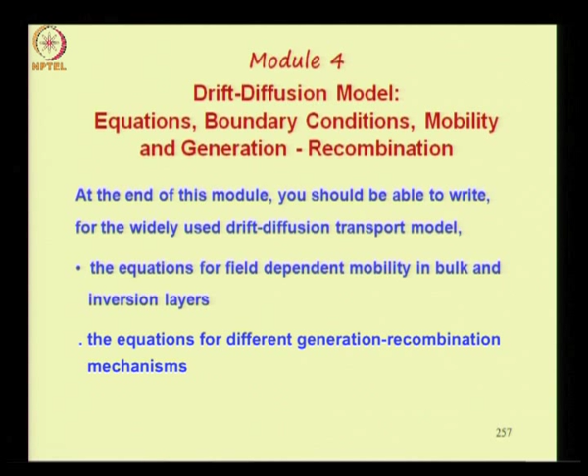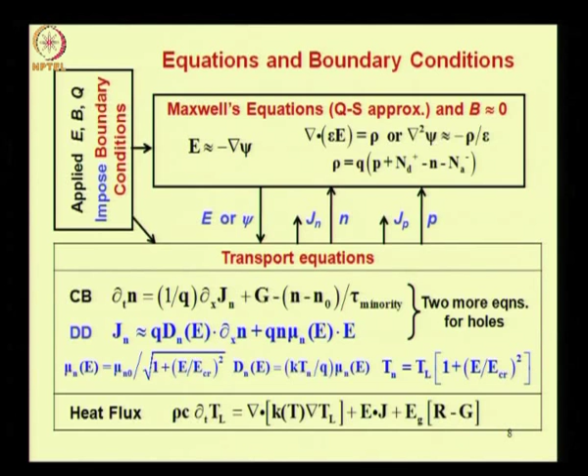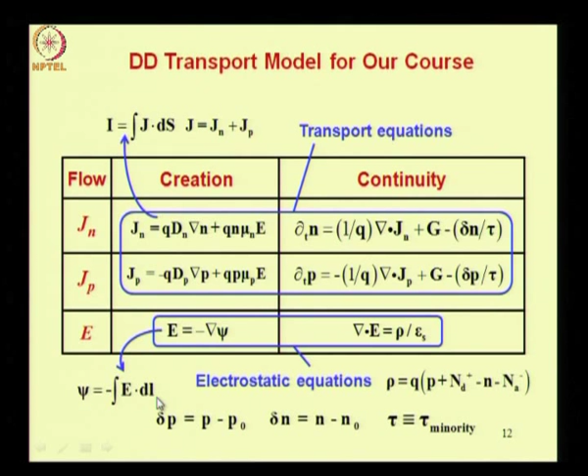Often the equations of Jn and Jp are referred to as current density equations, and the equations of carrier balance, the electron balance and hole carrier balance - that is, dou n by dou t and dou p by dou t - involving these are referred to as continuity equations. And this equation is Gauss's law: divergence of E equal to rho by epsilon.

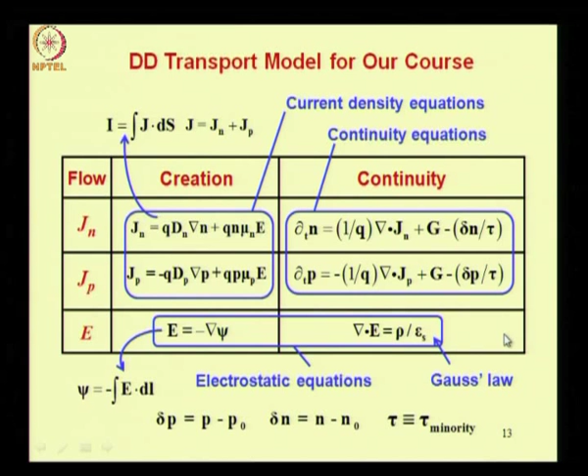Now, though we have 6 equations, ultimately they can be reduced to just 3. So, in a sense, in the drift diffusion model there are just 3 coupled equations, and these are continuity equations in n, p and psi. So how do you get these?

These equations are obtained by substituting the equations from the creation column into the continuity column, subject to conditions on n, p and psi at device boundaries. So you take the equation for Jn from this column and put it in the continuity equation, in the divergence of Jn term.

Now, Jn is given in terms of the carrier concentration and the electric field. The electric field in turn depends on the potential psi. So if I combine the equation for Jn and substitute it here, ultimately I will get an equation for n in terms of psi and other quantities.

I can do the same thing for Jp - take Jp and substitute it in the continuity equation. Finally, I take the equation E equals minus grad psi and put it into Gauss's law, and I get the Poisson's equation in psi. That is how I reduce these 6 equations into just 3 coupled equations.

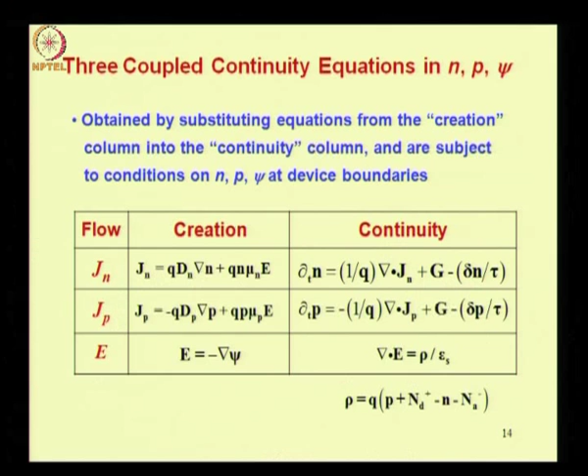Now, what is the physical meaning of this mathematical coupling? When we say these equations are coupled, it denotes the fact that carriers perturb the field which causes their motion. The motion of carriers is because of the field, but as carriers move, they redistribute the concentration, and this redistribution sets up a space charge, which creates an electric field according to Gauss's law. That is how it is a coupled situation.

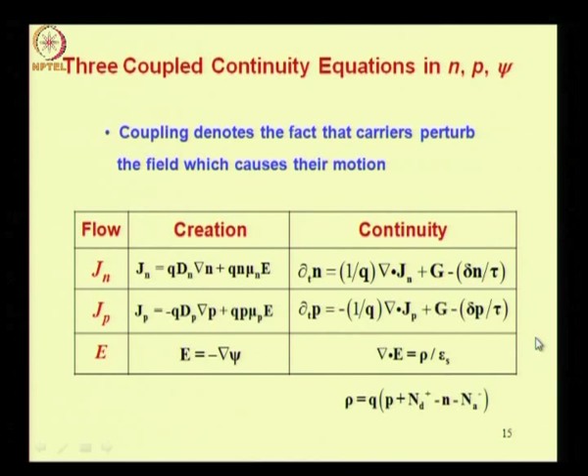Now we have not written down the 3 coupled equations - I am leaving it to you as an assignment. Write the 3 coupled equations in n, p and psi, assuming the mobilities of electrons and holes mu, the diffusion coefficients d, the lifetime of minority carriers, and the dielectric constant of the semiconductor epsilon s are spatially invariant. In the previous module we used epsilon for the semiconductor dielectric constant; in this module we add a suffix s, because we will also encounter the dielectric constant of the ambient surroundings, denoted epsilon suffix a, to have clarity on which dielectric constant we are referring to.

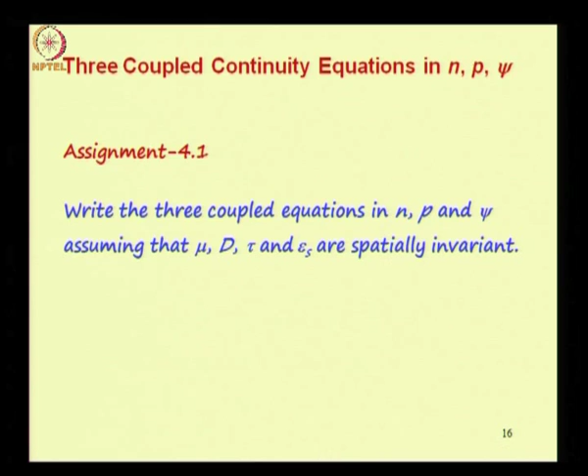Let us look at the boundary conditions on n, p and psi. The 3 boundary conditions, one each on n, p and psi, are required to solve the 3 equations.

Now the boundary condition on a quantity such as n, p or psi can be on either the magnitude of the quantity. Such a condition is called the Dirichlet condition, or the derivative of the quantity. Such a condition is called the Neumann condition, or a combination of the other two, referred to as a mixed condition.

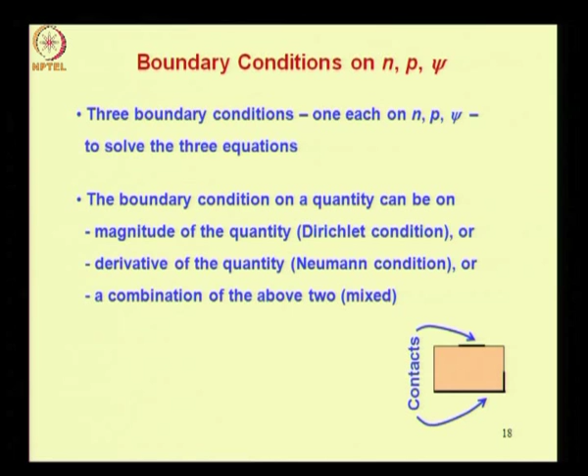In other words, the boundary condition can be on n, p and psi, or gradient of n, gradient of p and gradient of psi, or on a combination. So you can have a boundary condition on the electron concentration given in terms of an equation which consists of both n as well as grad n. That is the mixed condition.

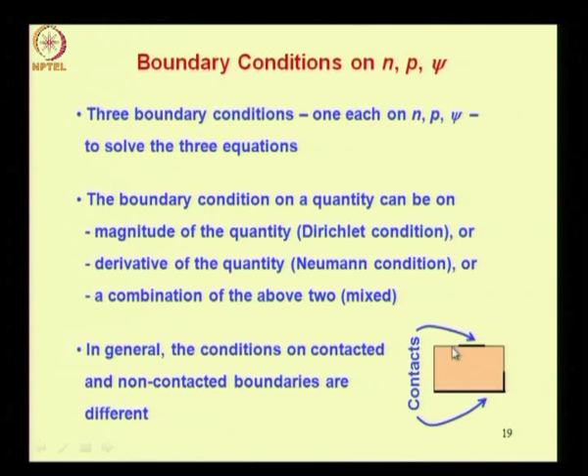In general, the conditions on contacted and non-contacted boundaries are different. Here is a conceptual device showing the contacts and the non-contacted boundaries. Let us look at ideal boundary conditions on n, p and psi, which we shall illustrate with the help of an example.

Let us say you have a uniform semiconductor block with a short contact on the top surface and a contact covering the entire bottom surface, and you are applying a voltage between these two. This situation is referred to as a spreading resistance, because the current spreads from a smaller contact to a larger contact.

Now at the contacts, the ideal conditions on n, p and psi are that the carrier concentrations are uniform at their equilibrium values. So n is equal to n naught, p is equal to p naught - uniform concentration at this end wherever you have the contact. Similarly, you have uniform concentration equal to the equilibrium concentration at the bottom contact as well, n equal to n naught and p equal to p naught.

The potential is assumed to be uniform, like the uniform concentration. At the top contact, the potential is assumed to be psi s equal to psi naught plus V, where s refers to the surface - psi s is the potential at the semiconductor surface. This is equal to a built-in potential plus applied voltage. Since in general the semiconductor may be non-uniform, there can be a built-in potential, so that is also incorporated here, and V is the applied voltage.

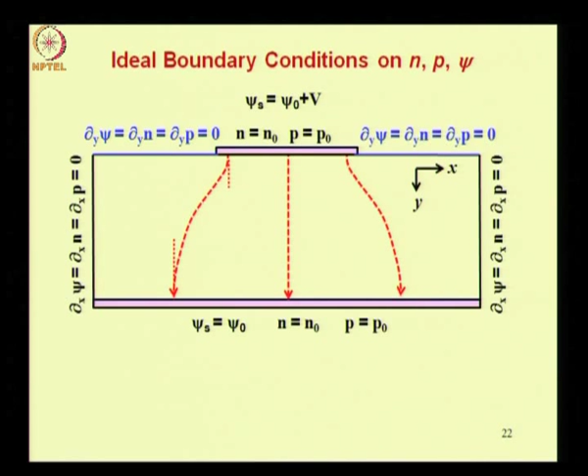The same thing applies to the potential line emerging from the sides. So even here the potential line is perpendicular, meaning in this direction there is no field.

Summarizing the boundary conditions, the ideal boundary conditions you have at an ideal ohmic contact: carrier concentration is equal to the equilibrium value and uniform, and the potential is also uniform at the applied voltage plus the built-in voltage. At an ideal non-contact, the perpendicular gradients of the concentrations N and P and the perpendicular gradient of the potential are all 0, because no current can escape or no field can escape out of the device or enter the device.

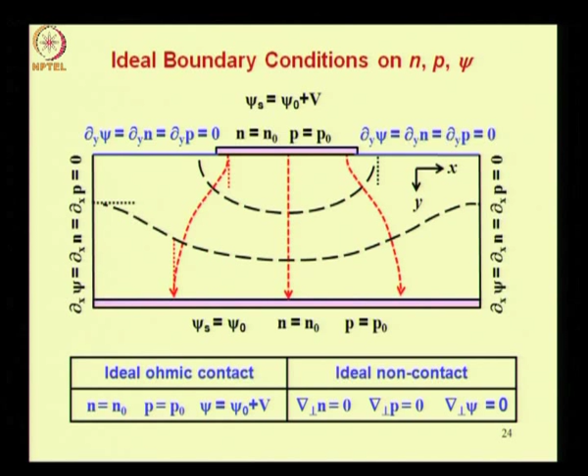Now let us look at general boundary conditions. What we have discussed so far are ideal conditions, which may apply in many devices, particularly large size devices. However, there can be instances when you do not have the ideal conditions existing. Let us look at, in general, what factors can influence the conditions on n, p and psi at the boundaries.

We would like to define a few quantities here. JTE is thermionic emission current density, JTUN is tunneling current density, R suffix C is contact resistivity, rho suffix S is surface charge density. So rho without suffix S is space charge, that is charge per unit volume, but rho suffix S is charge per unit area.

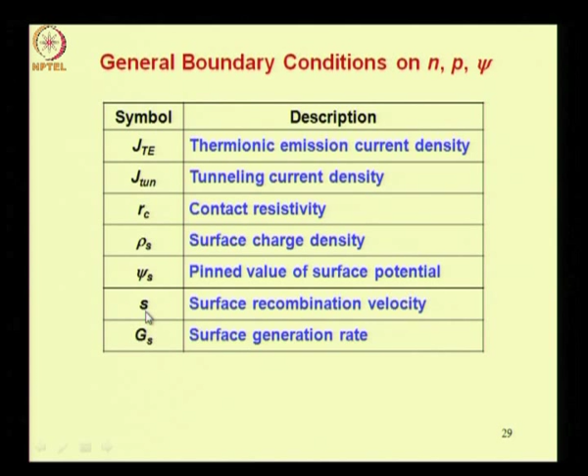Psi S is the pinned value of surface potential; we have already used this term in the ideal boundary conditions. S is surface recombination velocity. G suffix S is surface generation rate. Epsilon suffix A is ambient permittivity and epsilon suffix S is semiconductor permittivity. These epsilons include the permittivity of vacuum, so epsilon S, for example, would be equal to the dielectric constant of the semiconductor multiplied by the permittivity of free space.

Now we shall write the equations for n, and similar equations would be used for p. So whenever we are writing equations involving both p and n, that will be evident.

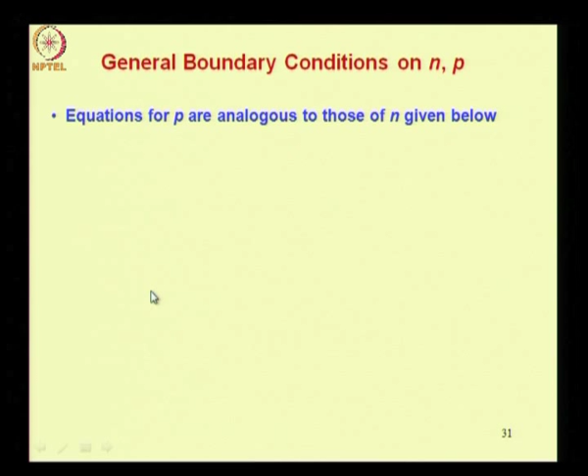At any boundary at x equal to 0, let us assume you have a semiconductor block as shown here, and we are assuming a one dimensional situation in the x dimension, and the boundary we are talking about is at x is equal to 0 — this vertical boundary.

Now, at any boundary, the condition is imposed in terms of the perpendicular current density. This is the important point, because we can talk in terms of how much current is leaving or entering the boundary perpendicular to it. At contacts, you will have a non-zero current leaving or entering the boundary perpendicular to it. At non-contacts, you will have no current entering or leaving the boundary. Therefore, though ultimately we want conditions on n, p and psi, basically the conditions are on the current density, and from there we can derive the conditions on n, p and psi.

Any current density is composed of the diffusion current and the drift current in our drift diffusion model. Let us explain the symbolism here. So what does J n perpendicular at 0 mean? What does the perpendicular gradient of n at x equal to 0 mean, and so on?

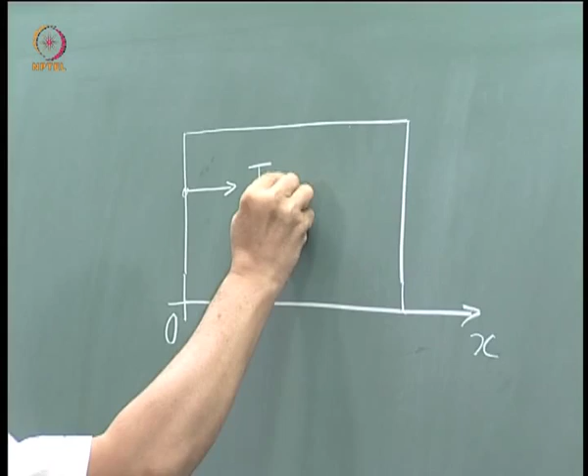So, this is your semiconductor, and let us say this is the x direction and this is the origin. The current at this point in this direction is referred to as Jn perpendicular with a 0 there, meaning the value of this current at this point.

Similarly, the electric field perpendicular means the electric field in this direction at 0, that means the field here. n of 0 means the electron concentration at this point, so that would be n of 0.

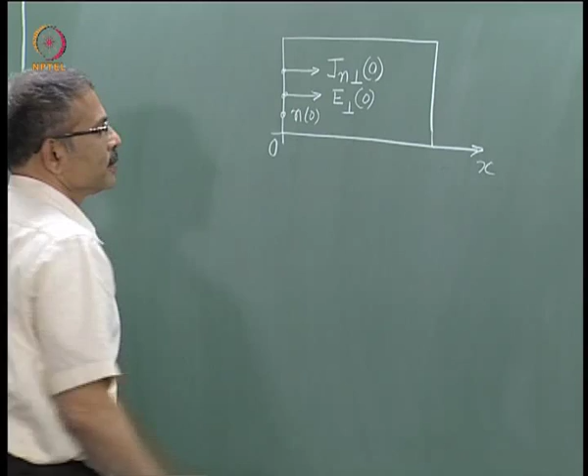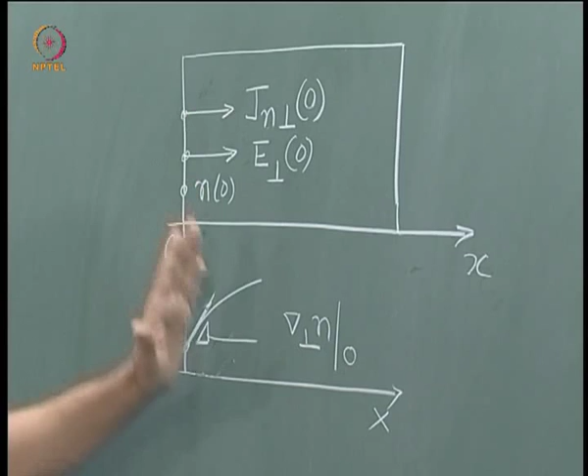Now, what about the perpendicular gradient of n? For example, if within the device your carrier concentration of electrons is changing like this, then this is the gradient of the electron concentration at the origin. So this gradient is referred to as the perpendicular gradient of electrons, and since it is at this point, we call it with a suffix at x equal to 0. So this is the meaning of the various terms used in the equation.

At any non-contact boundary, again assuming that the boundary is at x equal to 0, n and p are related based on the condition that the total current J is equal to 0, that is Jn perpendicular at 0 plus Jp perpendicular at x equal to 0 is equal to 0.

This is important. Actually, at a non-contact boundary, no current can enter, and when we talk about no current, you must consider the combination of electron and hole currents, not just individual currents. Let me give you an example where the individual currents of electrons and holes are non-zero, but their sum contributing to the total current is 0.

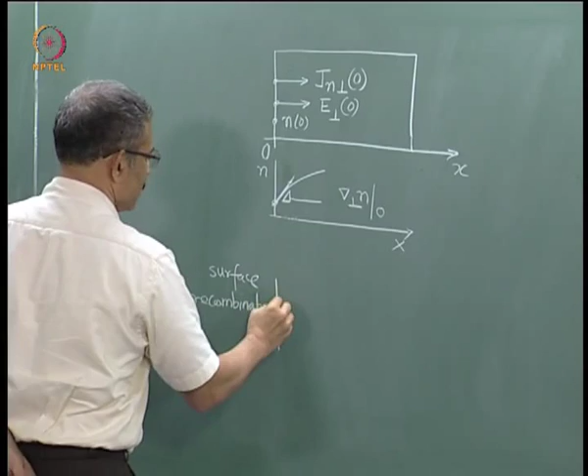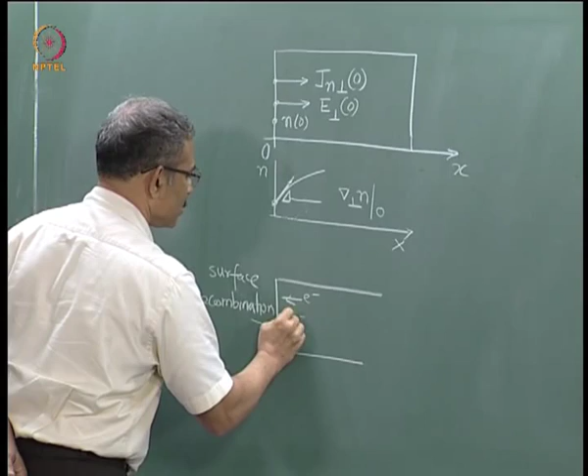Suppose I have surface recombination at this surface, and this is your semiconductor. Then what will happen is the electrons will tend to move in this direction and holes will also tend to move in this direction, and here at the surface they will recombine.

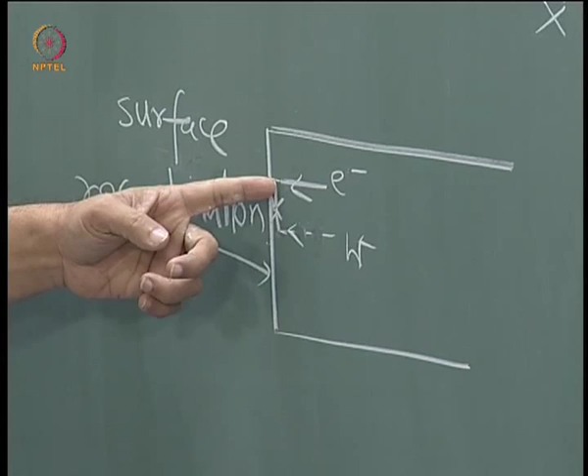So you see, because of the electron movement into the surface, you have an electron current, Jn, in this direction. If electrons are moving in this direction, your Jn perpendicular is like this, and if the holes are moving in this direction, it contributes to Jp perpendicular like this, and these two currents are cancelling each other. That is how it is resulting in the condition J perpendicular at 0 is equal to 0.

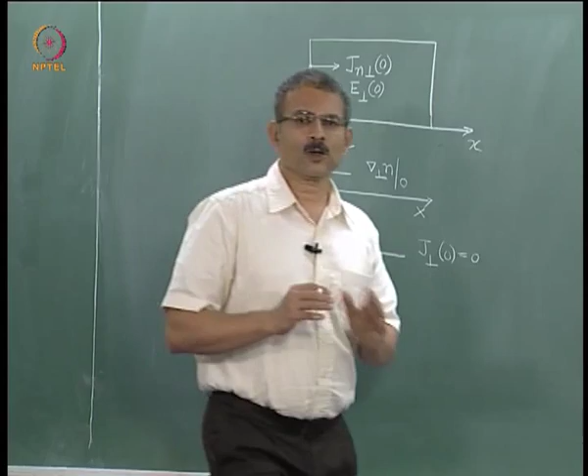So this is an example of a non-contact surface with surface recombination. You have both electron currents and hole currents at the surface, but the sum total of them is 0. Therefore, at a non-contact surface, we must think in terms of the total current to begin with, and later on we may find that if there is no surface recombination, then individually also the currents can be 0.

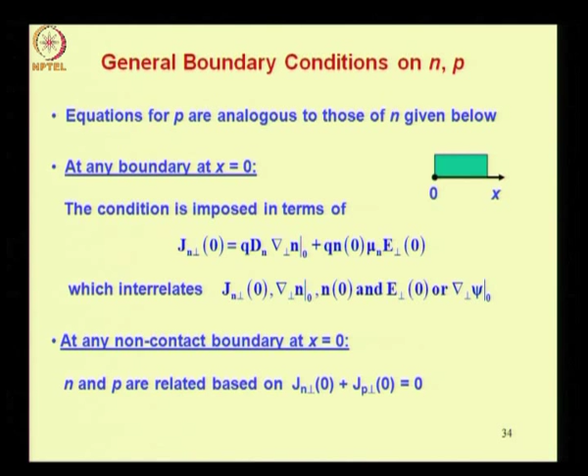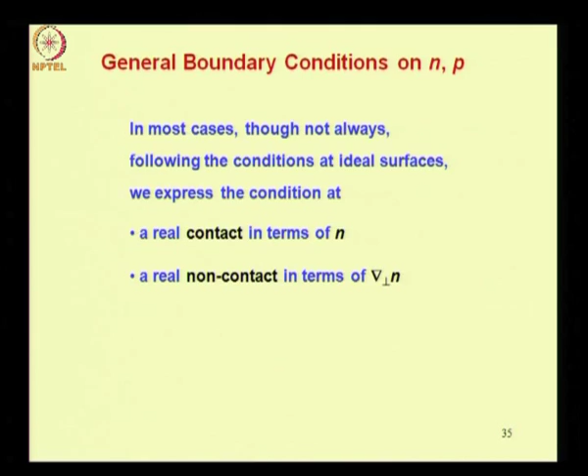In most cases, though not always, following the conditions at ideal surfaces, we express the condition at a real contact in terms of n, and a real non-contact in terms of the perpendicular gradient of n at the surface. We said that under ideal conditions, at an ideal contact, the electron concentration n equals the equilibrium value. Therefore it makes sense to see under non-ideal conditions how much n differs from n naught. Similarly, the ideal condition at a non-contact is that the perpendicular gradient of n is equal to 0. It therefore makes sense to see how the perpendicular gradient of n differs from 0.

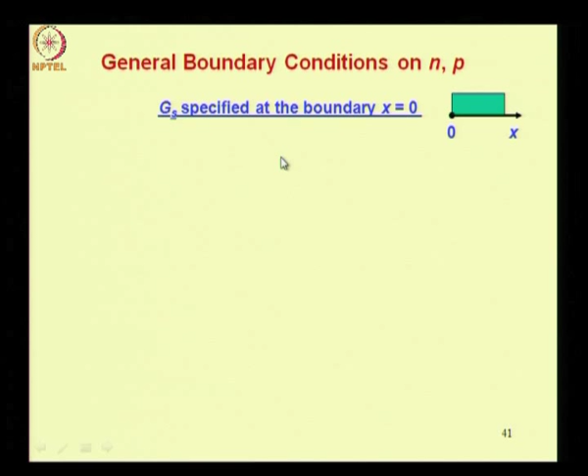Now you are setting Jn perpendicular at x equal to 0 equal to minus q times Gs. This transforms to this equation when you split the perpendicular current density into diffusion and drift components. Now let us explain what is the meaning of this Jn perpendicular at x equal to 0 equal to minus q times Gs.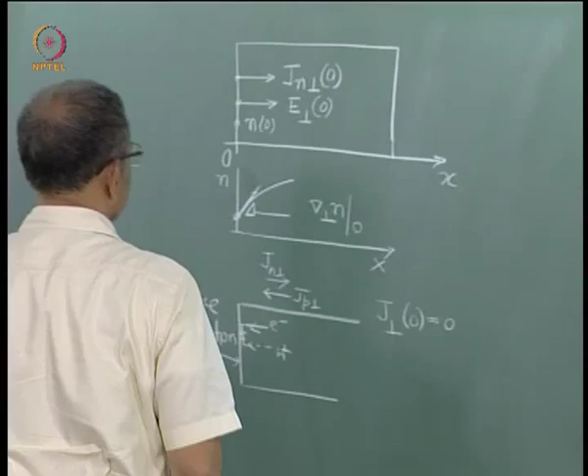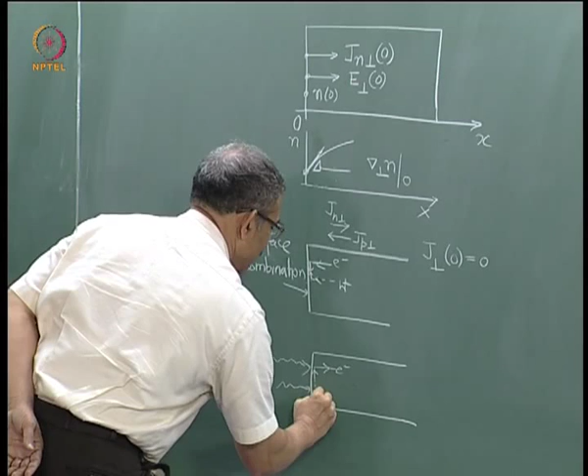So here we are assuming a surface generation at this end. Surface generation has units of per centimeter square per second - number of photons impinging per centimeter square per second, and each of them, let us assume for simplicity, gives rise to an electron hole pair. As a result, you have electrons flowing in, so you have generation of electrons and holes, and then the holes and electrons move in. So it is this current that we are relating to this Gs. That is what we are doing.

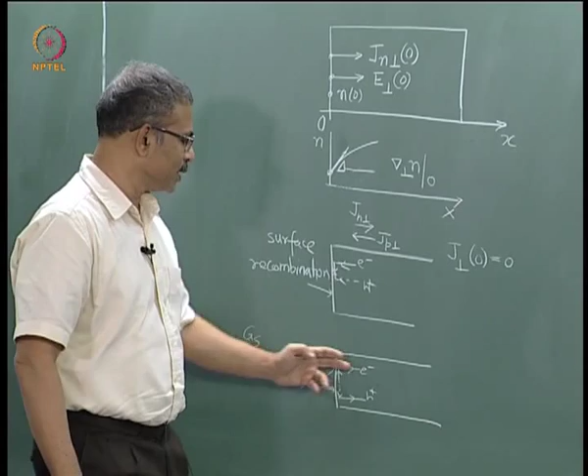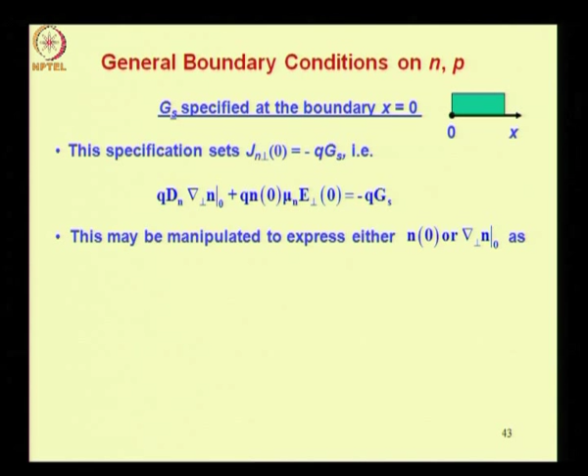Now you can again manipulate this equation as we did for surface recombination, and you will get two equations, one in terms of the electron concentration at the boundary, and the other in terms of the perpendicular gradient of electron concentration. So you will choose n of 0, this equation at contact, and this equation at non-contact.

Now if the thermionic emission or tunneling currents are specified at the boundary, then the equations look very similar to the equations for Gs. All that you need to do is apply the above formulae with Gs replaced by the thermionic emission current density plus the tunneling current density, divided by Q. So you set Gs equal to this value, then you get the boundary conditions in terms of these current densities.

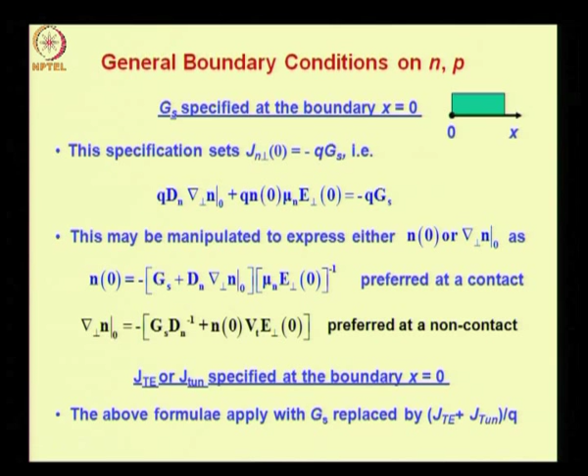Now so far we have discussed the conditions on N and P. Now let us discuss the conditions on the potential psi. You would recall from the formulae we derived for the boundary conditions on N and P that there was an electric field term also, the perpendicular component of the electric field at the boundary. This was entering into the formulae for the real boundary conditions. Therefore we need to understand how we can derive this information, that is, the perpendicular value of electric field, and we also need to know how the applied voltages and so on impose conditions.

So this is what is done now. So, general boundary conditions on psi. Now consider a contact with applied voltage V at the boundary x equal to 0. So we are applying a voltage at this end.

Consequently, the boundary condition on the potential at the surface of the semiconductor, psi s, is happening inside the semiconductor at the surface. We will shortly explain this with a diagram. This is equal to built-in voltage or built-in potential psi naught plus the applied voltage V minus the contact resistance RC into the perpendicular component of the current at the boundary. Note that this current includes both electron as well as hole currents. Let us explain this formula with a diagram.

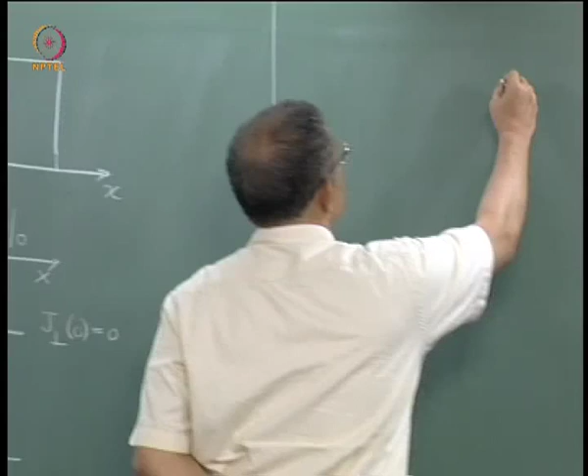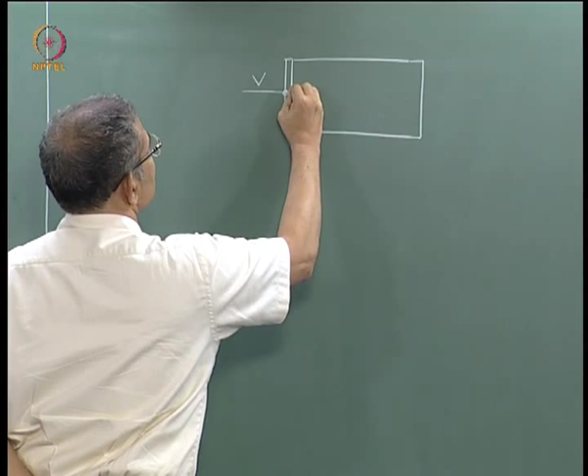So now this is the contact at this end, and the voltage is applied at the outside, this is the voltage. Now the psi s is here. From this point to this point, when the current is entering the semiconductor and moving across the contact, it encounters a resistance. So if I were to expand this part, it is something like this.

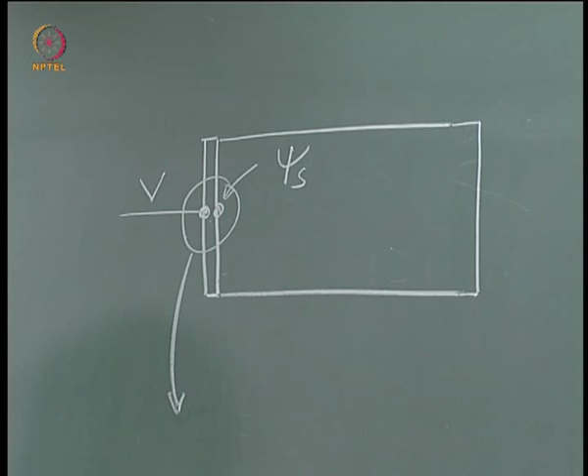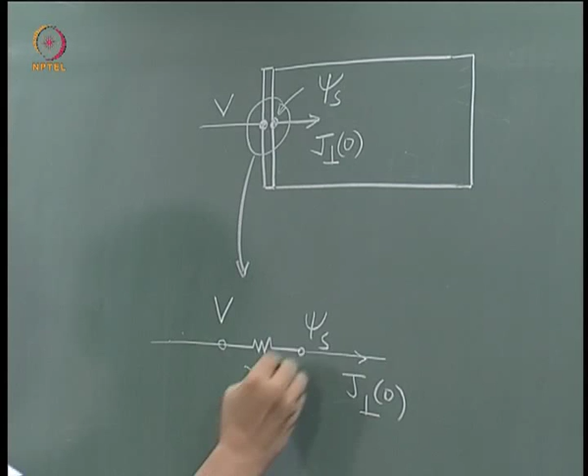So this is psi s, this is V, this is the contact resistance RC, and you have a current. Now the current is in this direction and that is J perpendicular at the boundary. This current, which is the same as this current, is J perpendicular. So therefore you get the equation that V is equal to RC into J perpendicular at this point 0, which is the x equal to 0 point.

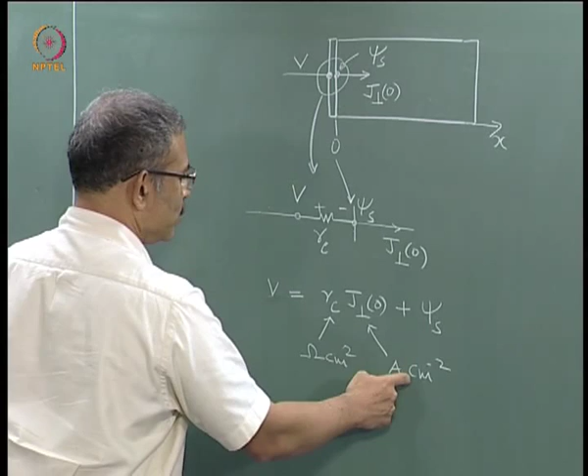So you have this potential drop plus psi s. Right now I have ignored the built-in potential. Now carefully note the dimensions. The dimensions of RC is ohm centimeter square, because the dimension of this current density is ampere per centimeter square. So when you multiply these two, I must get volts. So I can transform this relation to express psi s. So psi s is equal to V minus this quantity, and then you can add the built-in potential. Now that is what is done here.

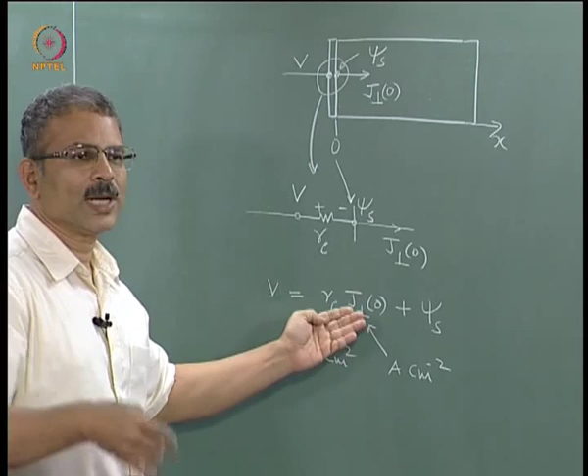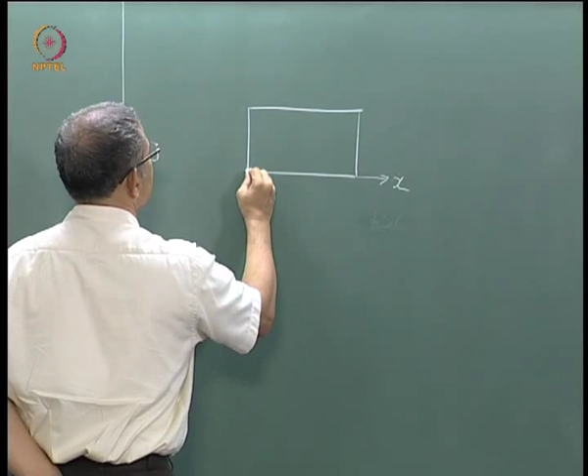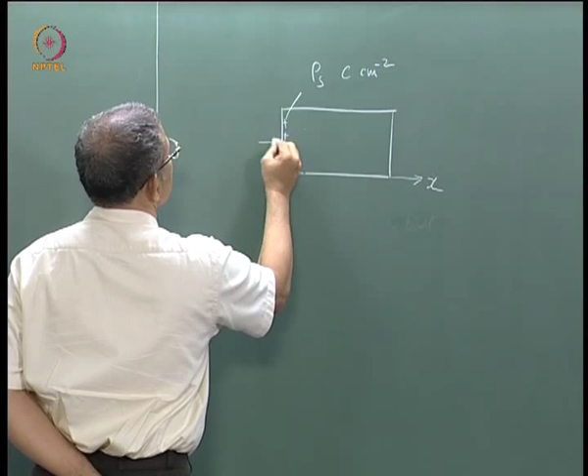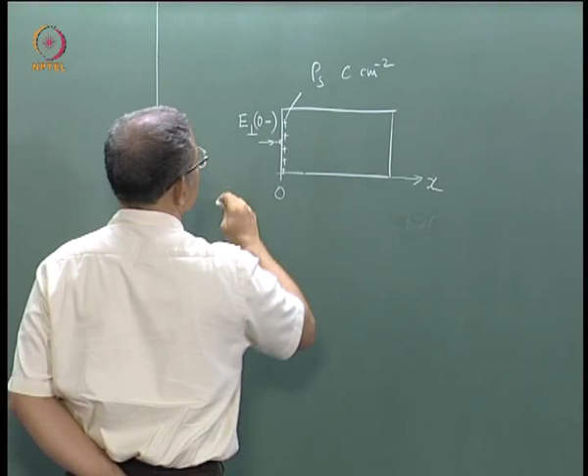Let us explain this equation. So this is the origin, and here you have a surface charge, this is Coulomb per centimeter square. The field at this point, but from outside, this field is referred to as the perpendicular field at 0 minus. So 0 minus is this side and 0 plus is this side. Now these lines will anyway continue through.

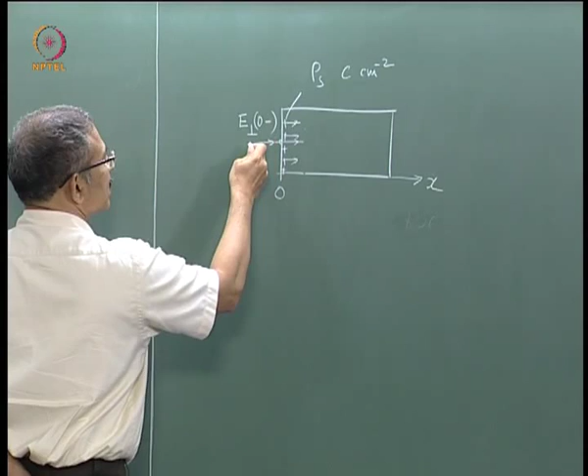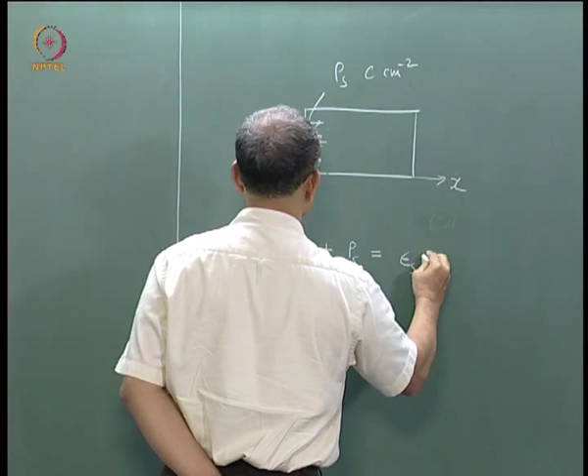Each of these positive charges will also contribute field lines. So the field inside will be more than the field outside, assuming that the field is directed in this way, because this is our positive x direction, that is our convention. So from here we can write the displacement: epsilon A into perpendicular component of electric field at 0 minus, that is the displacement here, plus the contributions of the surface charge rho S. So this displacement plus this will together contribute to the field inside. You can see there are more lines of field inside than outside, because each positive charge is contributing. Therefore, this is equal to epsilon S into E perpendicular 0 plus. So 0 plus means field inside. That is how you get this relation.

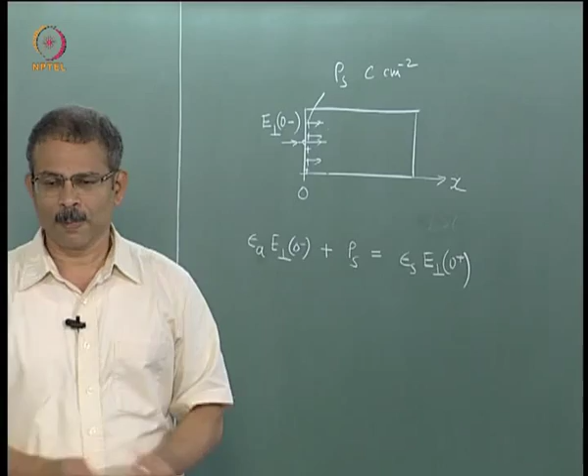Now you can convert this into a relation for perpendicular gradient of the potential by using this formula. This formula should be used for each of the electric fields, this one as well as this one. You can get then conditions on the potential.

Now at an ideal non-contact, this condition will correspond to no surface charge. So rho S at that point 0 equal to 0, and the ambient dielectric constant is 0. So when you say that no field escapes the device or no field enters the device from outside, you are indirectly assuming that the dielectric constant of the ambient is 0. Now you know that this is evidently not correct. So in general, for a device, field will always exist even outside the device volume. This point has to be borne in mind. We shall shortly show an example where if you neglect this field in the ambient, you can get grossly inaccurate results.

Before we go on to that example, let us make a point that the perpendicular component of the electric field in the semiconductor, that is 0 plus, where 0 plus is the semiconductor side of the boundary.

This electric field is needed to determine the carrier concentration at the boundary, or the gradient of the carrier concentration in the real case. This we have seen in the formula that we derived.

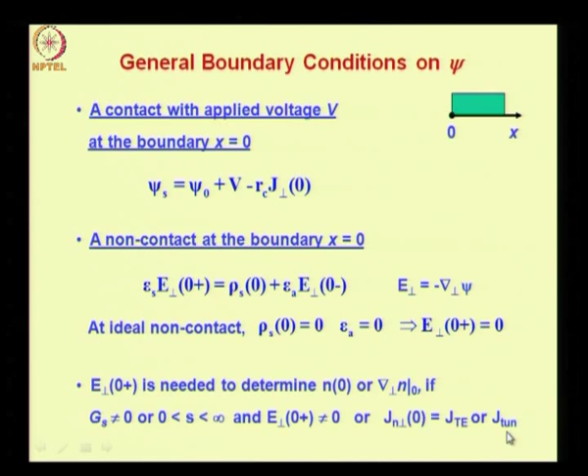Now here is the example which tells you why you must consider the field in the ambient as well. Let me tell you the situation. This is a nanowire, a very small scale wire. Nanowire means the diameter of the wire can be of the order of say few tens of angstroms. That is the kind of wire that we are considering.

Now as you can see, when you draw a diagram to scale, a lot of field is going to exist in the ambient. For example, from the probe you will have field lines entering the semiconductor nanowire all along the surface.

Because of the potential gradient, the top is 0.6 volts and bottom is 0. So there is a potential variation along the wire from top to bottom, and therefore there are field lines not only inside the semiconductor but outside the semiconductor, and they are entering the semiconductor.

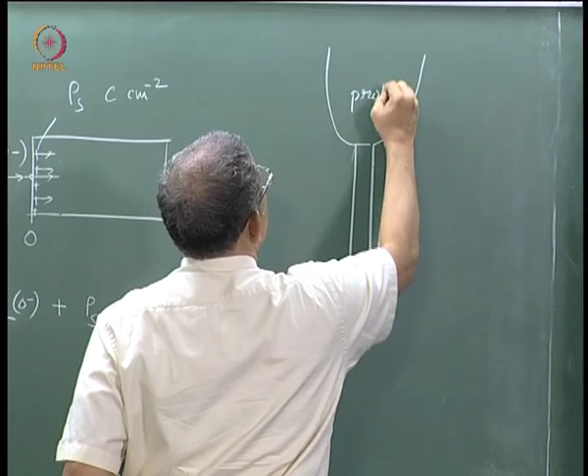So this is your wire on a substrate, and this is your probe. Now if there is no field in the ambient, you have just a straightforward field picture like this. This is 0.6 volts and this is 0. So you have field lines like this, but when you consider the field in the ambient, the field lines are emanating from here and terminating like this. They emanate perpendicular to the surface here and terminate here.

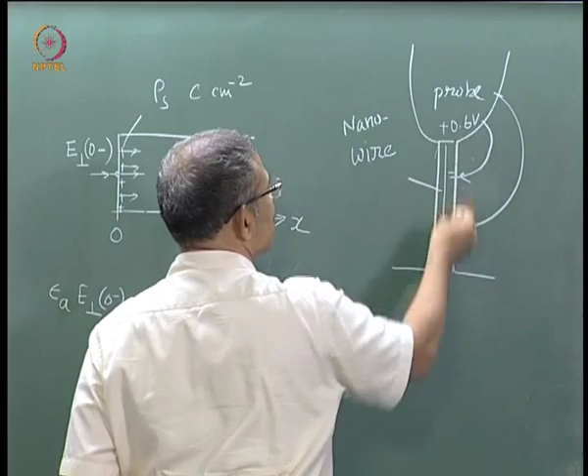Now this contributes to charges. For example, lines will terminate on electrons here. In other words, there will be enhancement of the negative charge in the wire. If it is an n-type wire, you will have more electrons, the conductivity will increase, it will be modulated. So that is the effect of the ambient field.

This should explain why boundary conditions should be appropriately imposed to get correct results, and in particular one must be careful while neglecting the electric field in the ambient. So ideal boundary conditions should be used with a lot of care. While they simplify your modeling problem and calculations, they may give you grossly inaccurate results, particularly for small devices.

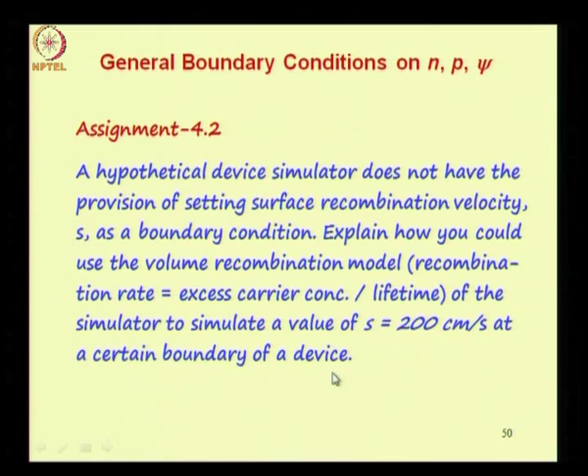We are towards the end of the lecture. A couple of assignments related to boundary conditions: a hypothetical device simulator does not have the provision of setting surface recombination velocity S as a boundary condition. Explain how you could use the volume recombination model, that is recombination rate equal to excess carrier concentration divided by lifetime, to simulate a value of S equal to 200 centimeters per second at a certain boundary of a device. So you actually want to simulate surface recombination at a boundary, but your simulator does not have a provision for that. Can you use a model for volume recombination around this surface and simulate the surface recombination? That is the question.

Another one: explain how S imposes a condition on N if the boundary is conducting, that is contacted, but on perpendicular gradient of N if the boundary is insulating, that is non-contacted or free. Write an expression for perpendicular gradient of carrier concentration at an insulating boundary in terms of the surface charge S and epsilon A. Assume surface recombination is present, surface charge is present, and the ambient dielectric constant is also there, so the field in the ambient also has to be considered. Take all this into account and write an expression. Explain which of the quantities N, P, psi or their derivatives at a contact boundary are affected by the surface charge.

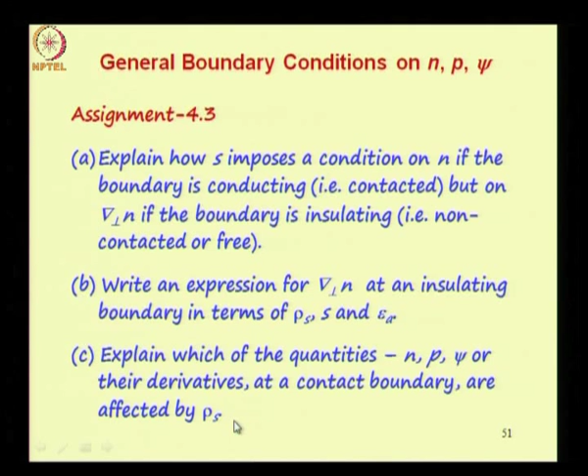Now with that we have come to the end of the lecture, so let us make a summary of the important points. In this lecture we began a detailed discussion of the drift diffusion model involving the drift diffusion current equation and other equations such as the continuity equations or carrier balance equations, the heat flux equation, Gauss's law, and an equation for electric field in terms of the potential gradient.

If you leave out the expression for heat flux, you have 6 equations in the drift diffusion model, and we showed that these 6 equations can be reduced to just 3 equations in terms of N, P and psi. Therefore to solve these equations you need 3 boundary conditions, one on N, one on P and one on psi. We explained how the boundary conditions can be imposed either on the value of the quantity or on the gradient of the quantity, that is the derivative of the quantity. So we discussed ideal boundary conditions and real boundary conditions.

The ideal boundary conditions were that the carrier concentrations and the potential are uniform at a contacted boundary, the carrier concentrations being equal to the equilibrium concentration, and the gradients of the carrier concentrations and potential are all 0 at non-contacted boundaries. We explained that in general the boundary conditions at contacted or non-contacted boundaries are derived in terms of information about current at these boundaries. For example, at a non-contacted boundary the net current either leaving the device or entering the device perpendicular to the surface is 0. Similarly for contacted boundaries one can derive the boundary conditions based on information about the current density.